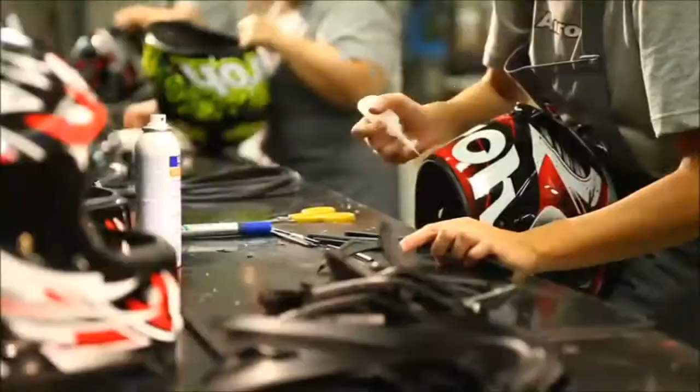Founder towards the important choice of becoming the absolute protagonist in the market of producing helmets for motorcyclists under the Airoh trademark.

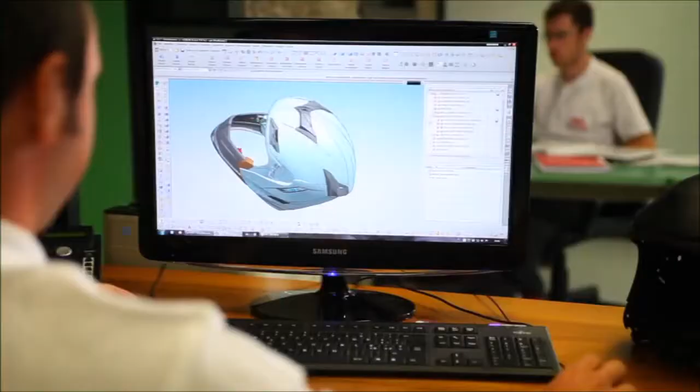After working in the past as a supplier for important realities in the sector, Antonio founded a small, limited liability company with only 15 employees in 1998. Over the years, with Airoh Helmets, the Locatelli firm has made itself the active interpreter of a positive company vision for doing business, becoming a joint stock company in 2004 and arriving today at a total of 64 employees, with a completely Italian economic activity induced by the motorcycle industry of about 25 firms.

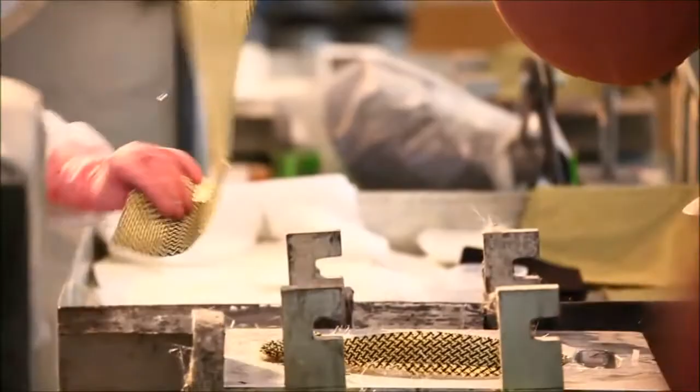Very great champions, but above all, great friends, thanks to relations based on trust and respect.

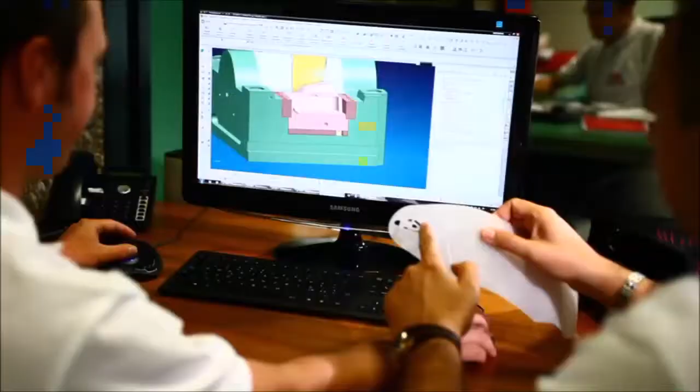Before taking shape, an Airoh helmet is mulled over by industrial designers for a long time and is studied carefully, as well in the planning phase and selection of the materials. It is then put under the scrutiny of the best professional pilots who contribute with their operative feedback to improving the performance of the helmet. An Airoh helmet is entrusted to the skillful hands of the production personnel only after this conceptual and planning process has taken place.

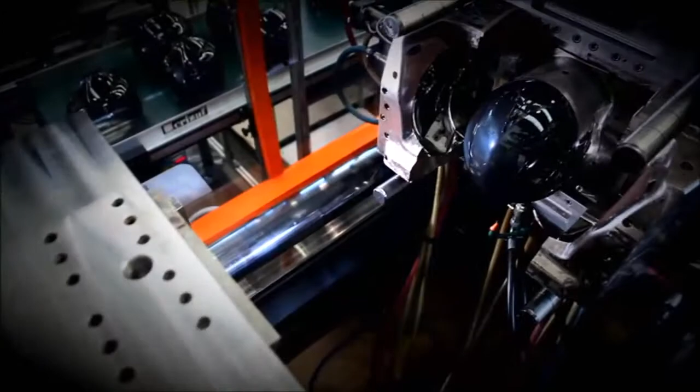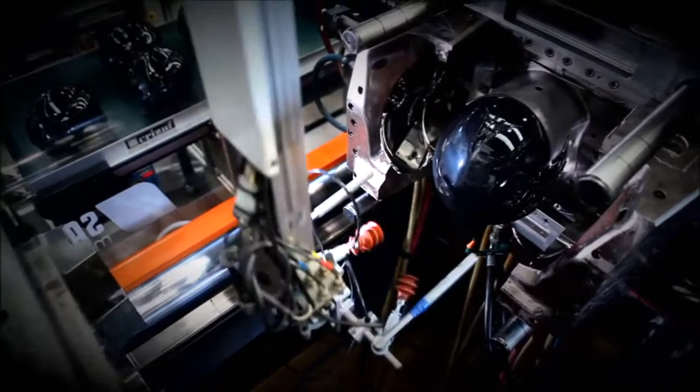For the top-range models, the headpiece is realized with composite materials, carbon fiber, and Kevlar. A meticulous manual work procedure makes every single helmet perfect in shape and in weight, a very important factor for racing helmets. Indeed, the Airoh helmets used by multi-champions are exactly the same ones that are sold in shops all over the world.

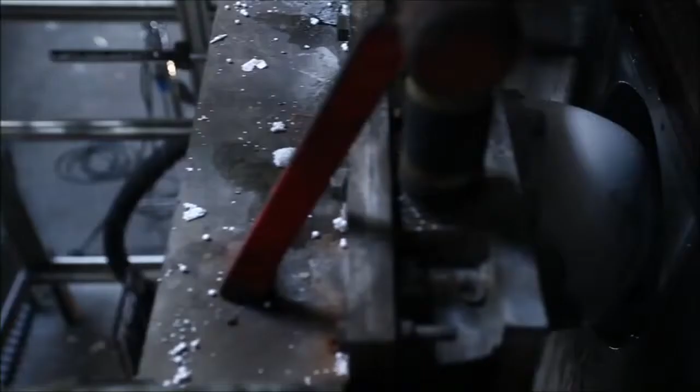The inside shell of the helmet is made of polystyrene that is obtained by means of a high-temperature steam molding process. The visors are molded and are then treated with anti-scratch procedures.

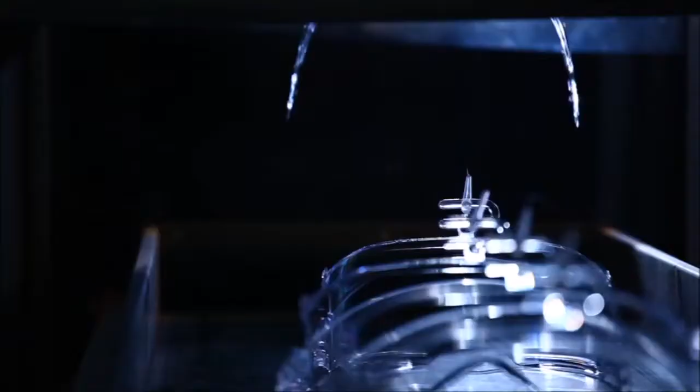The graphics of the helmet are executed thanks to the application of decals. This is a meticulous process that imparts to the helmet the perfect design to make it unique, while the painting of the headpieces must respect high qualitative and aesthetic standards, always with respect for the environment.

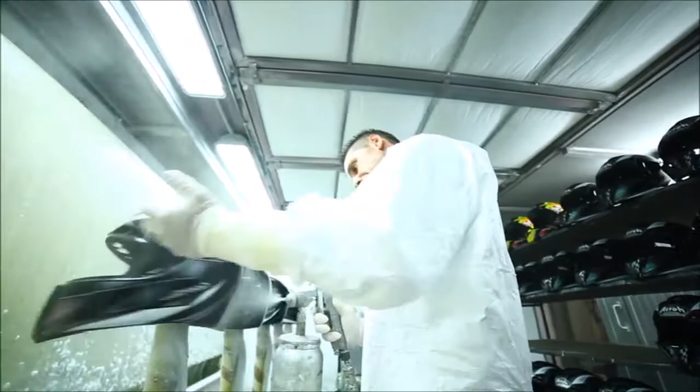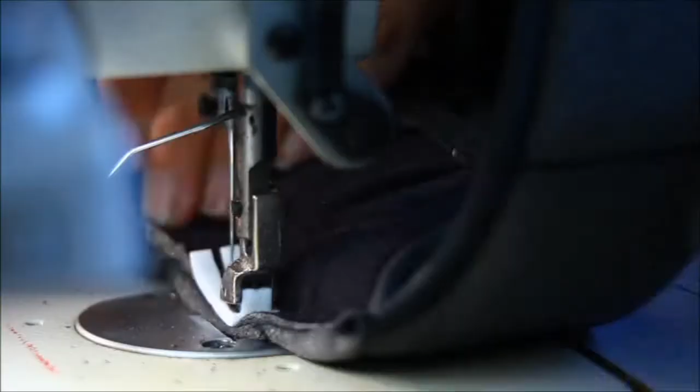For the interiors, which are hand-produced, innovative transpiring materials are employed that confer that extraordinary sensation of comfort and transpirability which distinguishes every Airoh helmet.

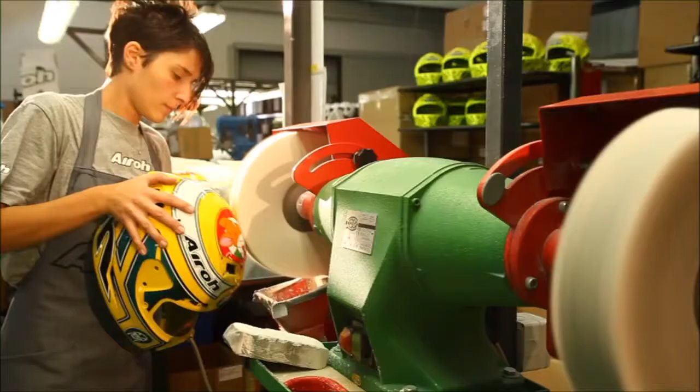The painstaking process of assembling the parts takes place at the main Locatelli SPA factory. Before and during the assembly, which is carried out by specialized personnel, each single component is carefully controlled and possibly discarded if it has the slightest imperfection, even at the level of the graphics.

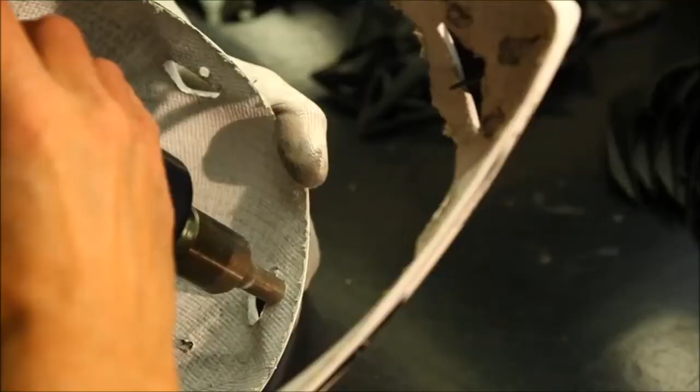Airoh's style is unmistakably made in Italy, in every line and model. These are creations with a modern design that anticipate the expectations of the market. However, Locatelli also signifies research, development, and the making of prototypes under the banner of safety above all else.

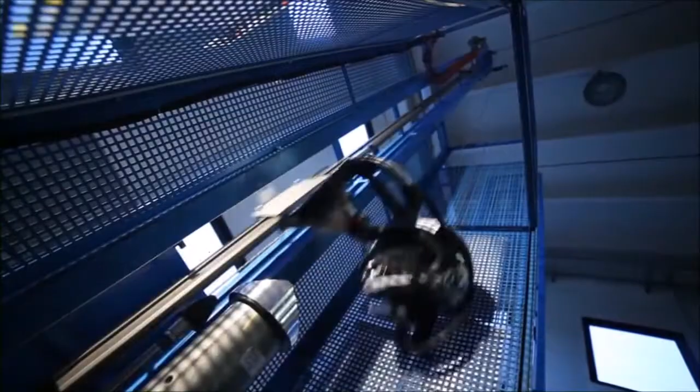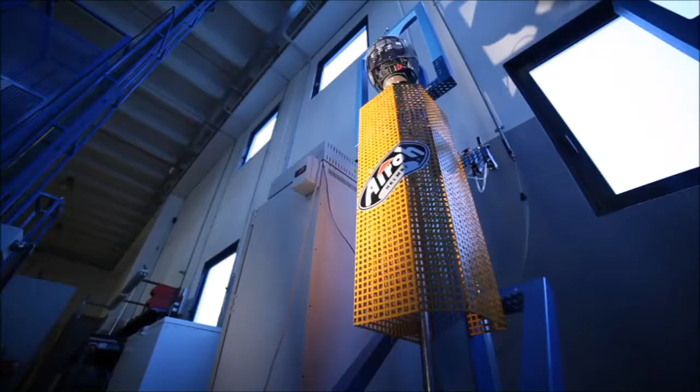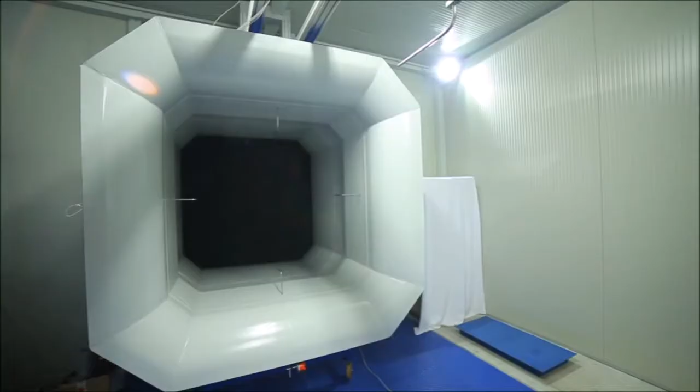Both the helmets in production and the prototypes are submitted to numerous and thorough crash tests. Not only that, all helmets are tested inside a wind tunnel in order to evaluate their different parameters of resistance to air, so as to increase their comfort, the inside aeration, the ergonomic quality, and their safety.

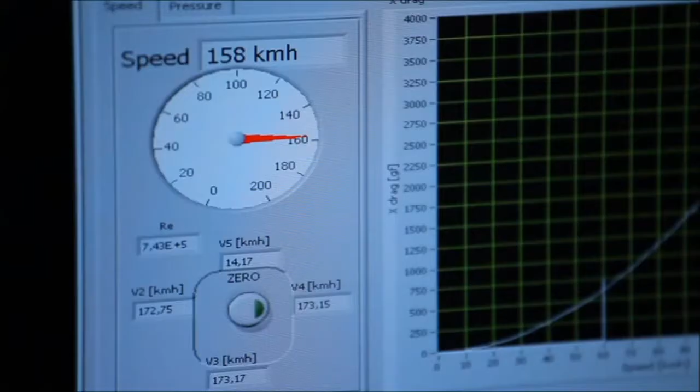Only in this way is it possible to comply completely with the strict parameters imposed by national and international regulations, and to respond to the request for greater safety on the part of professional pilots and the most demanding clientele.

Considerable share of the market: 70% of its turnover comes from foreign markets and 30% from the Italian market.

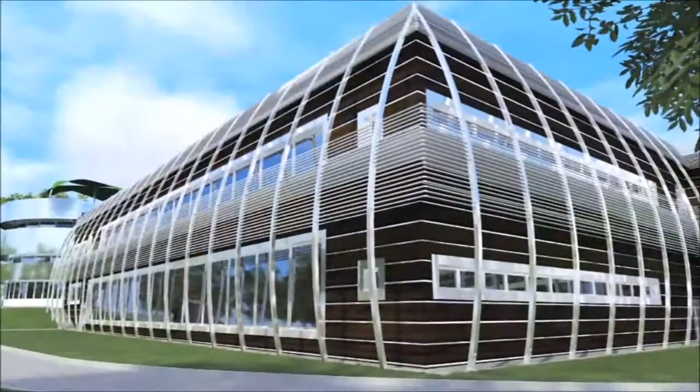This extraordinary history crosses the heart of Antonio Locatelli's entire family and is fragrant with true enthusiasm, an essential binder that induces the company to look towards the future, towards the factory that will shortly be built, towards new targets, always with the pride and dignity of a splendid reality that today is represented by the Airoh trademark.